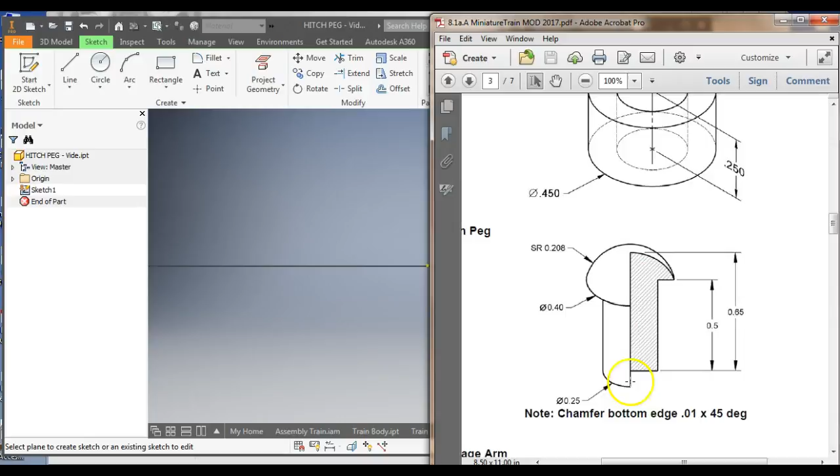One is that I could make a circle and I could extrude it up and then make the top part. Another way is that I could literally make this shape here and then I can do a rotation of it. I'm going to do it that way. So I'm going to come over here, start my sketch. I'm going to do a vertical one. And what I'm going to do is, here's my cross section that we just talked about. I'm going to draw this cross section here.

I'm going to move this over so I can see it. So I'm going to use the rectangle. And what some of you may not know is you can actually do the math right in there. Here it's telling me a diameter, but I'm really drawing in the radius there. So to get the radius, I need to do 0.25 divided by 2. That'll get me the radius. Now I also want to do this height here. I can click there and do 0.5. Notice that this took the 0.25 and divided it by 2 for us there already. So now this is just from here down.

Now there's a couple of ways to do this. This is spherical radius, meaning this is a ball shape on top. And this is the radius, not the diameter. So I could draw a circle here, but I don't know how high I want it to be. So I'm actually going to draw this diameter in next with a line here. I know it should come from here, and I know it should go out, and I know it should be half of 0.4. So again, I'm going to do 0.4 divided by 2 because that's the radius, and this is the diameter. And I'm going to click enter, and that draws the little line.

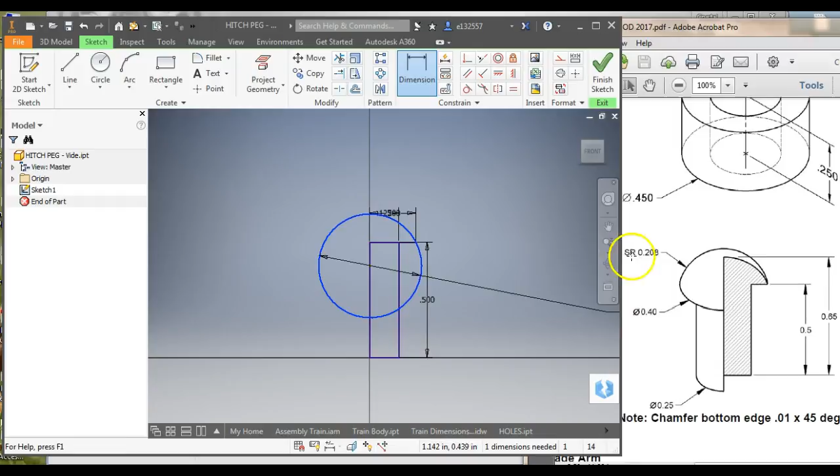Okay. Now I want a circle that's going through this point with the center on this line for this top part. So I need the center of the circle to be somewhere here. I need it to go exactly through the end of this line here. And I need the dimension of this circle to be, okay, that's the diameter, and this tells me the radius. So I need the diameter to be 2 times the radius. I'm going to click here. 0.208 times 2. And notice that it automatically popped it up so that this is the right radius. This distance I know is the correct distance because I set it here already, so that's correct.

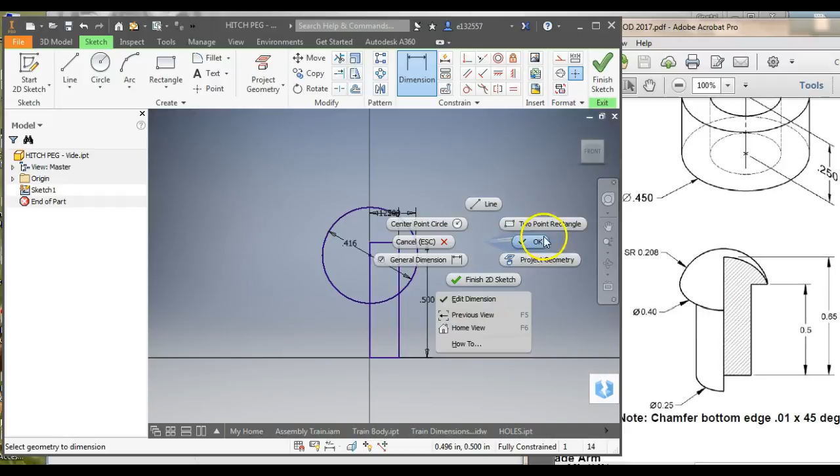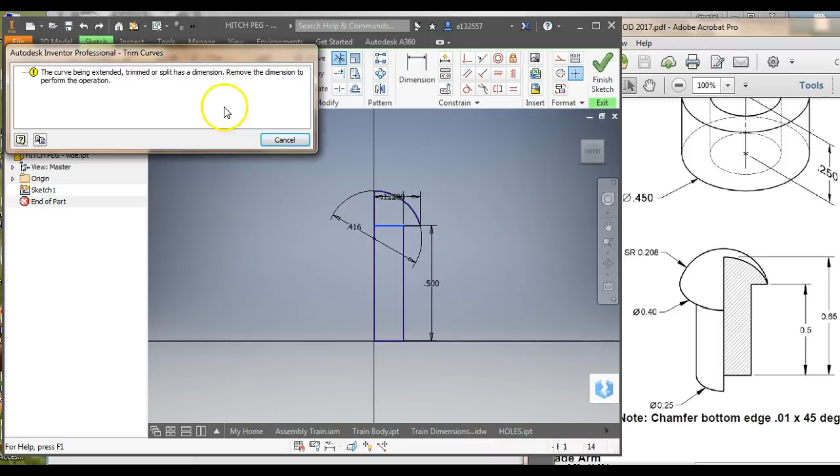Now, what do I need to do? Well, I need to get rid of all this part of the circle that's not right. So I'm going to go in and put a line from here to here. Then I'm going to go in and use my trim tool. Where's my trim? And click off this and that all needs to go. That part needs to. Now the problem is that this was actually part of my original rectangle. So I'm going to hit cancel here, and I'm going to come in and just click on this part. I'm going to click off a trim, click on this part.

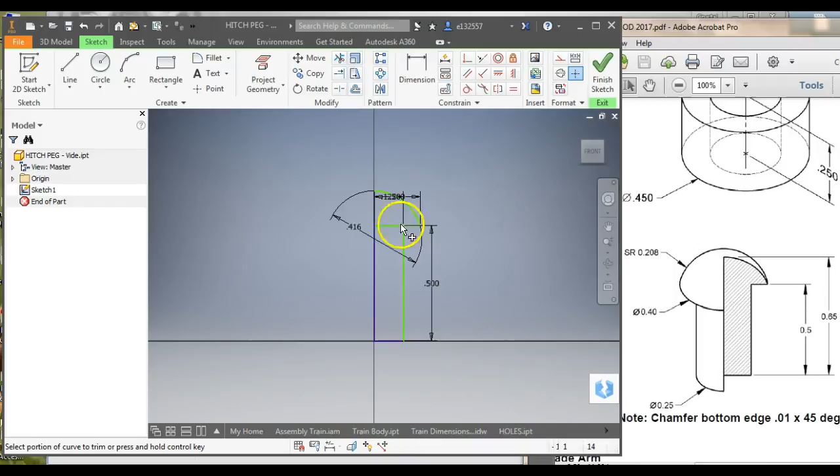This is saying that's part of the rectangle, so I'm going to actually click there and hit delete. Now I'm doing better. Now it's going to let me go in there and trim this little part out. So now I'm good. Click OK. Finish sketch. What do we need to do? We need to revolve this. There's the shape I need to revolve. Here's the axis I need to revolve around, and it's perfect.

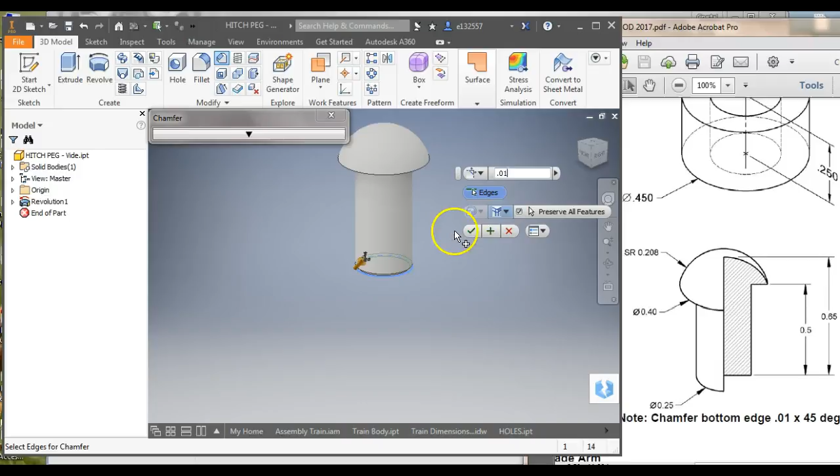What's the last thing I need to do to make this exactly like what this is? I need to do this chamfer at the bottom edge here. It says to chamfer the bottom, so I'm going to come in and do that. Chamfer this little bottom. It says 0.01. And we're good. Don't forget to come back in and do the little chamfers. That's all it is to make the hitch peg.